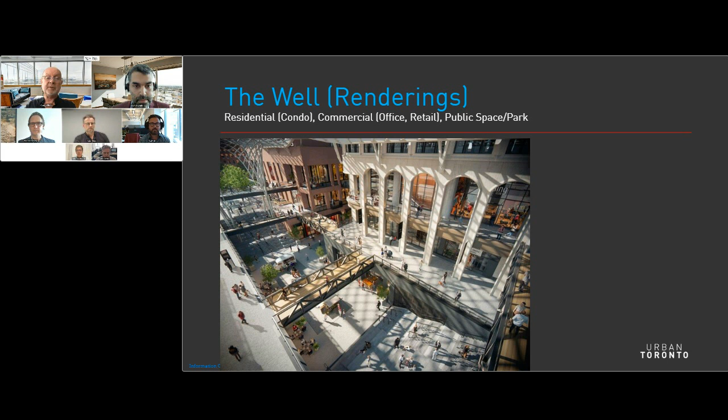Let's go all the way back to the beginning. Front and Spadina, on the upper middle right area of this slide, you can see the red brick building in front where Stantec and Adamson Associates are, and around that space, before the GO tracks, is where the Globe and Mail used to have their offices and printing plant. They have since moved out, and a huge tract of land, I think 18 acres, with small low-rise buildings on it, was highly underused. After being bought by RioCan, RioCan brought in Allied for offices, and Tridel and Woodburn for residential, along with Diamond Corp as well.

Adam Feldman from Architects Alliance, who have designed the residential buildings along Front Street. We'll be talking to Rod Pell from Wallman Architects, who've designed the residential buildings along Wellington Street. We'll be talking with Adrian Price of BDP, who has brought the whole retail experience to all of this. And we'll be starting, and coming back to later, with Michael Conway of Hariri Pontarini Architects, who were first approached by the developers to envision what could be built here, and then ended up also designing the office tower later on. So Michael, take it away.

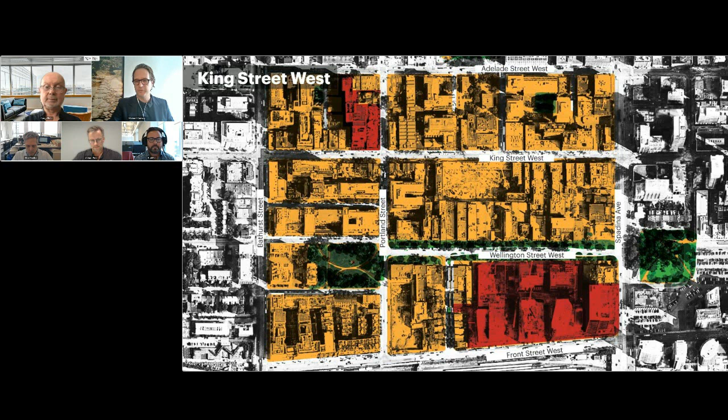One of the things that really defines the King West neighborhood is these really large former industrial blocks. But as you start to move through it, when you're walking, you quickly realize that it is a very porous neighborhood that is interconnected through a series of laneways and passageways that link all of these different blocks together. So when we started looking at King and Portland, one of the ideas was really trying to pick up this idea of this internal block network.

And then as we started looking at bookending it with the Well, it was really looking at taking these cues from the vibrancy that was starting to happen within King Street West, and really start to move that logic down through the Well.

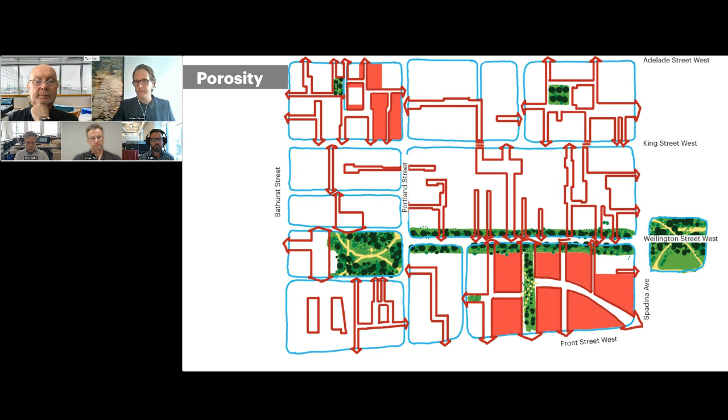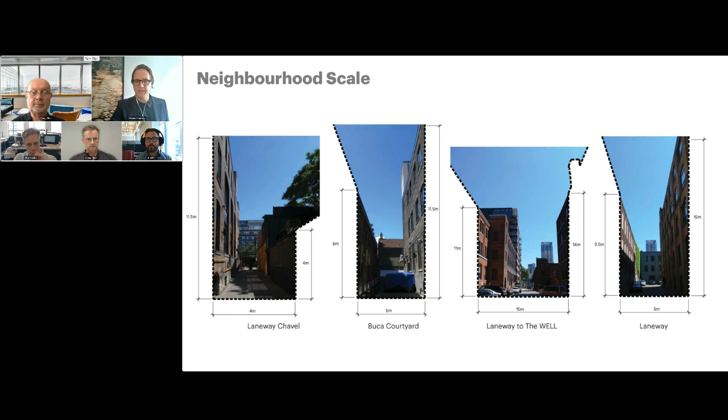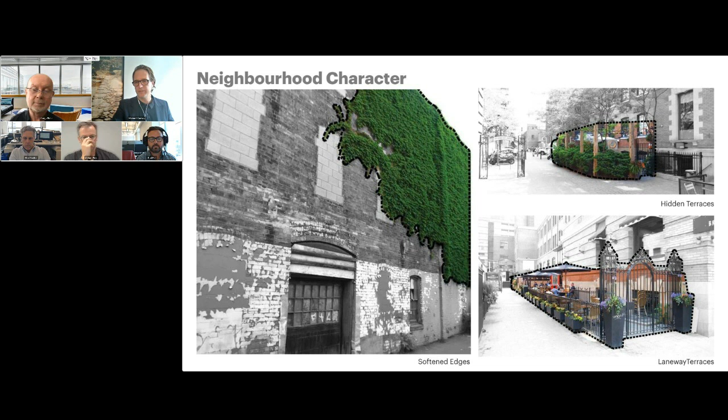One of the first things we started to look at was just walking through the neighborhood. It has a look and feel that is quite different from a lot of the different districts within Toronto. So we started to document some of these passageways and laneways, putting dimensions to it and number of stories, to get a sense of what it was about these spaces that held such a strong fascination within this part of town, as well as these spaces that started to emerge in between. We started to see these hidden terraces, these laneway terraces, as well as really unexpected moments that took place around some of these corners.

One of the first things we started to do was also engage with the community. With the community, we put together this drawing, what we called 'What We Heard,' which was three main ideas that we really wanted to push onto the site as we started to look at how we could define and develop the master plan for the Globe and Mail.

So the first thing was really this site wanted to be part of the King West neighborhood. So looking at tying into the existing laneways happening within King Street, and really drawing it back towards it. The second was connecting Victoria Memorial Park with Clarence Square. And then the third was bringing Draper Street into the development as a way of connecting it to Spadina.

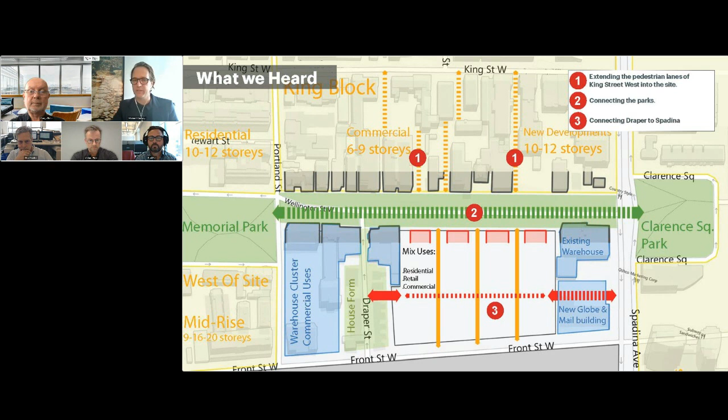At the same time, we started looking at trying to define what we wanted it to be, and also what it wasn't. So some of the early thinking is that it's not the financial district. It's King Street West - a vibrant mix of post and beam brick buildings that has vibrancy morning, noon, and night.

The second was that it's not a shopping mall. We started to look towards European examples of what we were calling urban retail. The partnership from the start ended up going to the UK to visit a lot of these mixed-use sites that were starting to be developed downtown as a way of revitalizing some of the older downtowns within the UK, which brought together retail and mixed-use elements.

So looking at the initial floor plan or ground floor plan concept, we started to incorporate these elements. The first is tying in these laneways from the existing King West neighborhood. The second was Claude Cormier starting to look at connecting the parks through what we're terming a barbell park. And then the third was this idea of the spine moving through the center of the project.

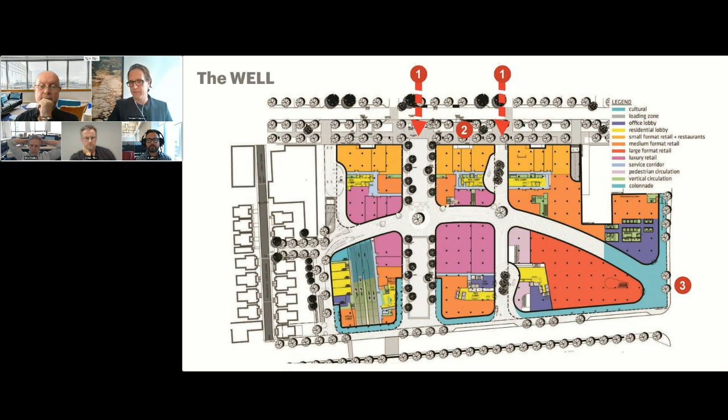One of the things that was kind of interesting with where we started to arc it was that it allowed the buildings to have different characters within the master plan. The Wellington buildings had a smaller scale that responded more to the post and beam industrial buildings along Wellington Street, but also opened up to larger blocks towards the south that could incorporate larger retail.

On the second floor, what we needed to do was create a racetrack that connected all of the second floor retail together. So one of the ideas we pushed was rather than having this exterior to the buildings, we pushed it into the building as a colonnade, and then used a series of bridges as a connection between the buildings, creating a free-form positioning within the master plan where it's just connected by bridges.

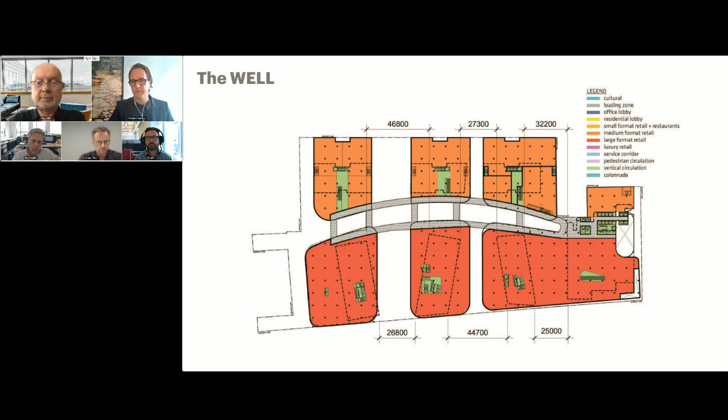And then finally, as we moved past the rezoning, it started to get divided up into multiple architects to really create that look and feel that's very much important within a city where it's not designed by one hand, but a collection of multiple architects working together.

HPA had worked on the office building at 8 Spadina. Architects Alliance had done the residential buildings along Front Street. Rudy Wallman Architects did the residential along Wellington. BDP had looked at all of the retail, and Adamson had looked at all of the below grade as well as all of the commercial aspects of the project.

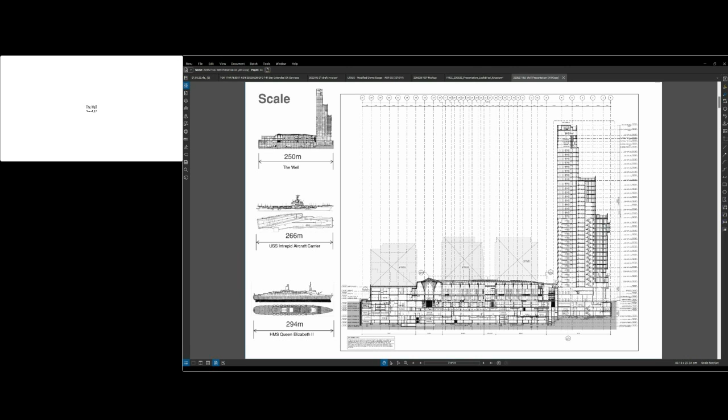As far as the project statistics, here are two images showing one of our working drawings of the below grade and an image of the project once it was well under construction. As Craig mentioned at the beginning, it's 7.7 acres with an overall footprint of 29,000 square meters, well over 300,000 square feet. There are 7 buildings, the tallest of which is Building G.

There are 7 basement levels, about 148,000 square meters... let's call it 1.5 million square feet of office, about 1.5 million square feet of residential. Total overall area is 3 million, probably close to 4 with the basements. 1,662 parking spots, probably one of the largest parking garages in the city. 30 loading bays and 2,600 bikes.

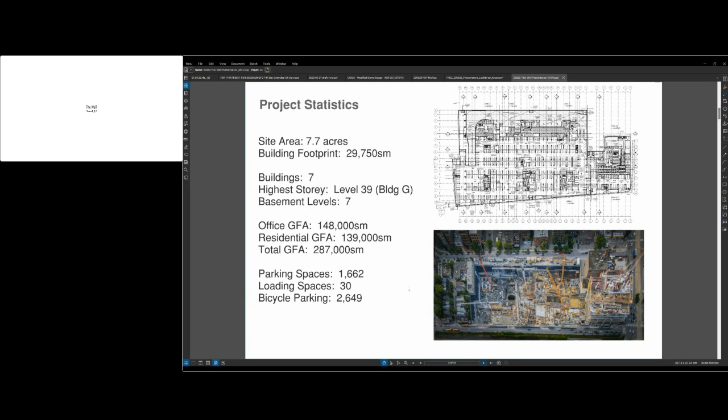Very large program. By the way, it's worth noting that the project does include a well, which you can see here as that round circular shape, which is a 75-foot deep well providing deep water cooling from Enwave.

As far as the org chart, it's often looked at as deceptively simple, but it's a critical element to organizing the team, the players, the stakeholders. This basically shows how we organize the project and the people involved. There's a tripartite owner: RioCan, Allied, and Diamond.

We, as the executive architects, coordinated a number of consultants as well as the owner's consultants. The consultants end up being divided into design, basically 4 designers, 4 prime engineers, and a number of specialist consultants. So 1 executive architect, 2 contractors, 3 owners, 4 architects, 9 owner's consultants, and 27 prime and specialist consultants — a large group of contributors and stakeholders that need to be managed and organized.

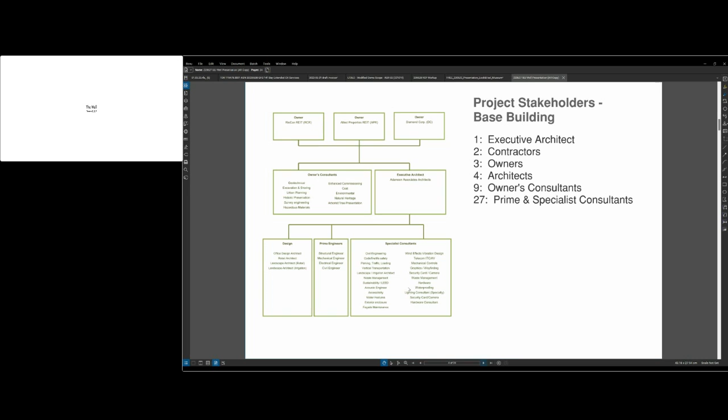Another tool that becomes indispensable in organizing a project like this is a clear schedule. Ultimately, a project of this nature turns into a schedule with thousands of line items, but in order to manage a team, one of our ultimate goals is to break it down into simple, understandable schedules, durations, and milestones.

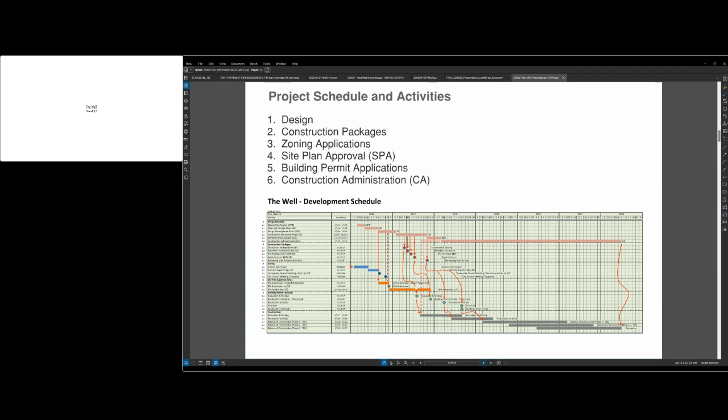For us, there's always a design schedule, a number of construction packages, a zoning path we have to follow through zoning, site plan approval, building permits, and construction. What was challenging here was the schematic design, design development, and CD phases — really 4, 5, and 9 months. Managing 7 buildings within these timeframes was very challenging, and how the building permits dropped out of that. This was done in 2016, but we ended up being very close to this completion date, so I think we got lucky.

Thanks to the skill of a lot of people. Another indispensable tool we use to organize a project is called the responsibility matrix. This is something we've been doing as a firm for a long time — a tool where we organize all of the stakeholders across the top, and we take the phases of the project, SD, CD, specs, approvals, bidding, negotiation, down the left-hand side. Every single individual company is assigned a role: prime, support, review, no role, or not applicable. This ultimately becomes what I'd call the project genome — it's almost like the DNA for the project, an indispensable tool for organizing who does what at the beginning.

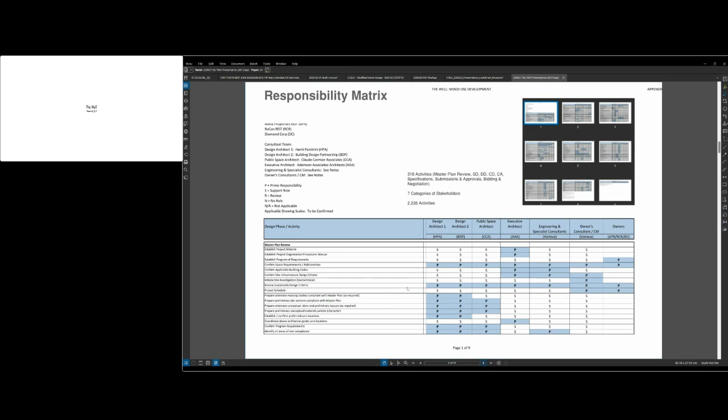We call projects like this very similar to what we call super tankers. You've got to load them up right at the beginning of the job, because once it leaves the port, it's very hard to turn around and go back for more gas or supplies.

So once again, how do you do a project of this size, shape, and complexity? It's by breaking it down into understandable, manageable pieces. In a project like this, it basically organized itself into 4 teams: the Building A team, which developed drawings for the buildings on Wellington, similar in size, shape, and complexity, ranging from 12 to 15 stories; Buildings D and E on Front Street; and finally the high-rise office component, F and G. It all boils down to people.

This was Anna, Rasha, Navjit, Steve, and everybody contributing to a typical set of details. That becomes our toolkit of typical details, which we can distribute and organize at the beginning of the project, and use as a kind of toolkit throughout.

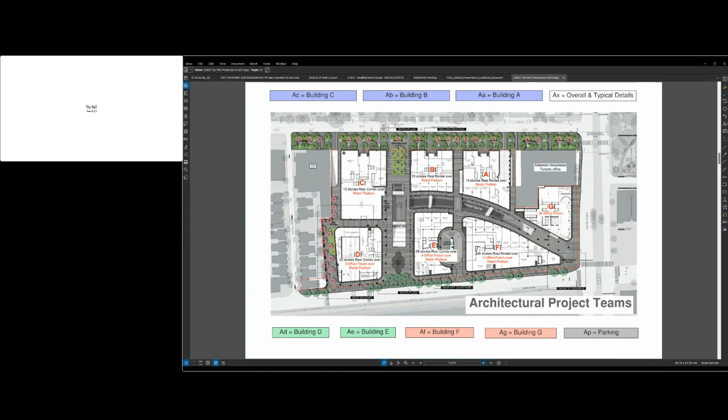Now, something we were asked by the client to do, which we don't normally do, is called stratification drawings. It was a very interesting exercise because at the end of the day, this project organized itself into what ended up being 14 buildings, or let's call it 14 different properties, and each one is identified with a color.

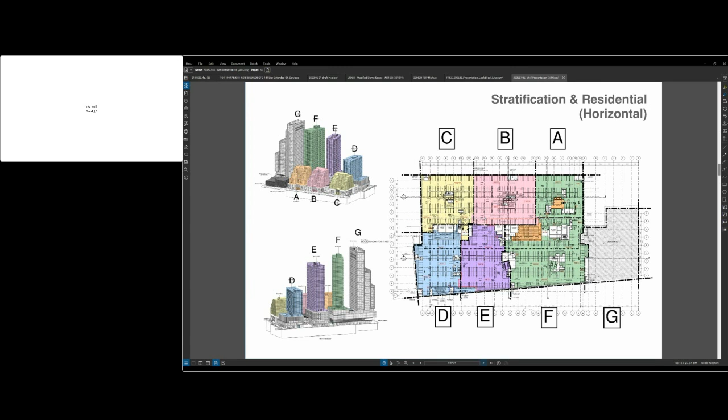Stratification became very important because, at the end of the day, the residential component, which I'll get to later, was organized on top of the office buildings, and everybody needed an easement over somebody else's property. It became a very complex exercise. This was ultimately handed to the surveyors, and they said this was the most complicated set of strata drawings they'd ever done. We were lucky enough for it to be our first.

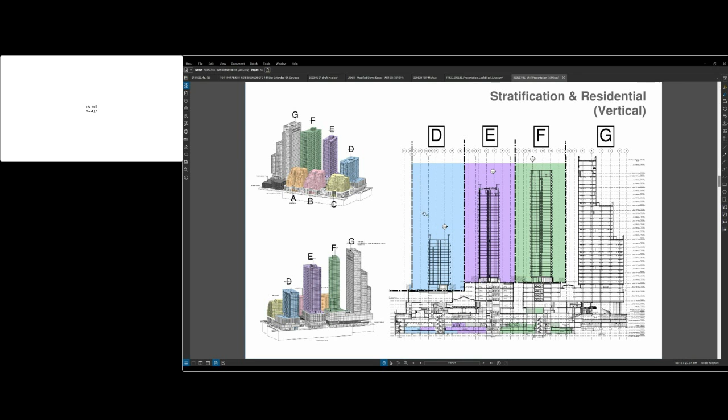So what ended up happening was that we had to coordinate all of the services, access, elevators, vertical transportation, utilities, you name it, to come into the site and be prepared to accept these buildings. So it literally became a plug and play type of scenario.

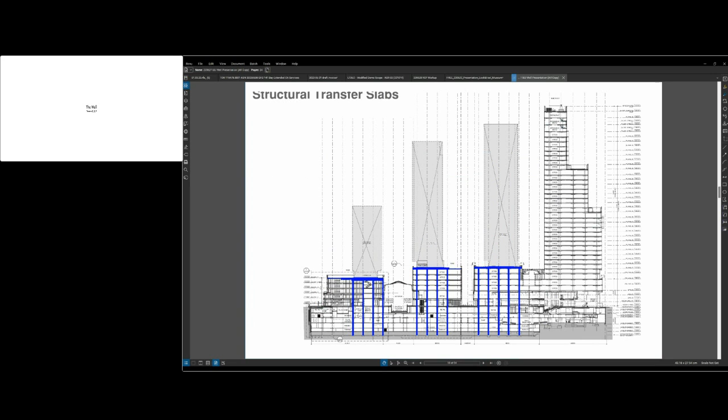Another indispensable tool when we talk about how we manage the design, the schedule, and the phasing was the use of a transfer slab, which we worked on with RJC. Here you basically see a representation of how those work. The transfer slab became incredibly useful because it allowed the designers of the residential buildings to continue designing as the circuit board, or the base building, continued.

It allowed them to continue designing and identify different shear wall options for the suites. It also allowed us to go to a wider column grid underneath, which was more appropriate for office buildings as well as the spaces in the podium and retail areas.

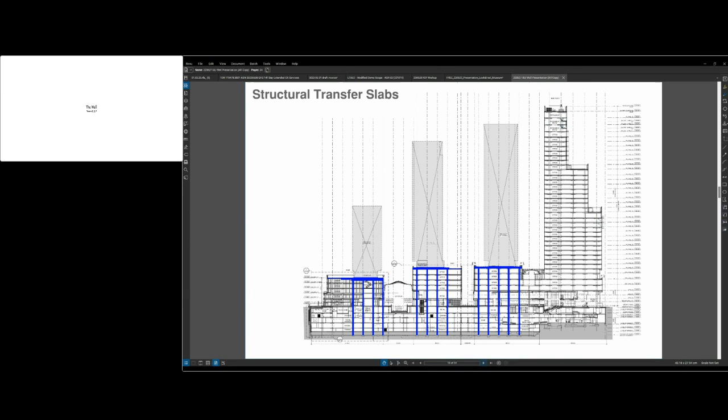These loads then become transferred to the transfer slab. We also had a transfer zone for the utilities, where utilities were capped, allowing these two very disparate aspects of the site to continue and march independently. It allowed the residential buildings to come along at any time in the future; however, at this point in the project, they all marched in sync.

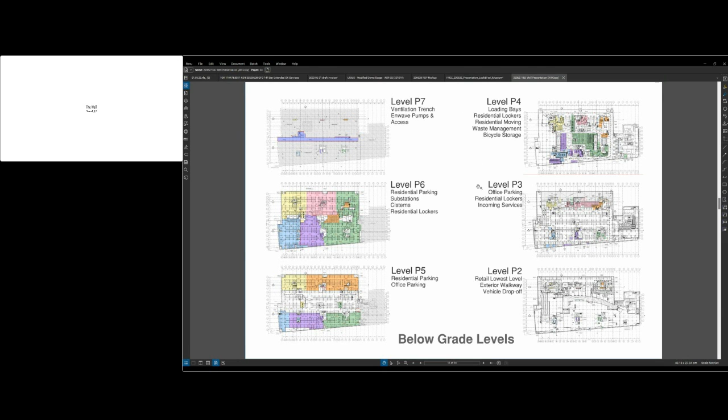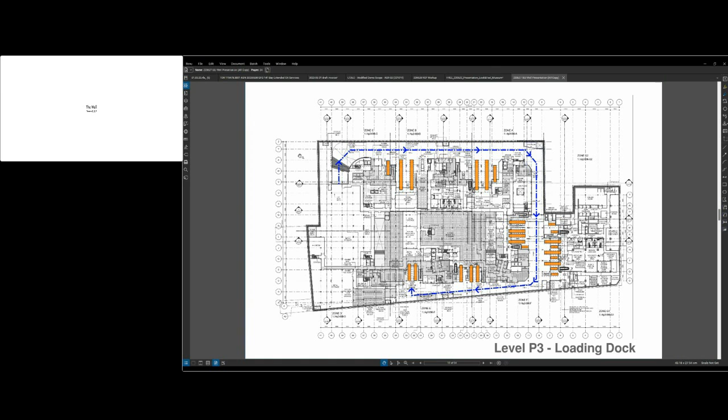I thought it's worth showing this level because once we identified exactly what it took to service a project like this, we realized very early on that this would need a dedicated service level, providing access for type A, B, C, and D trucks as well. So 30 vehicles come down the ramp, and every single core and every single residential building basically had its own loading, bikes, storage, moving, waste, and the vehicle servicing these can easily identify and use each one of these, with the office building located to the east.

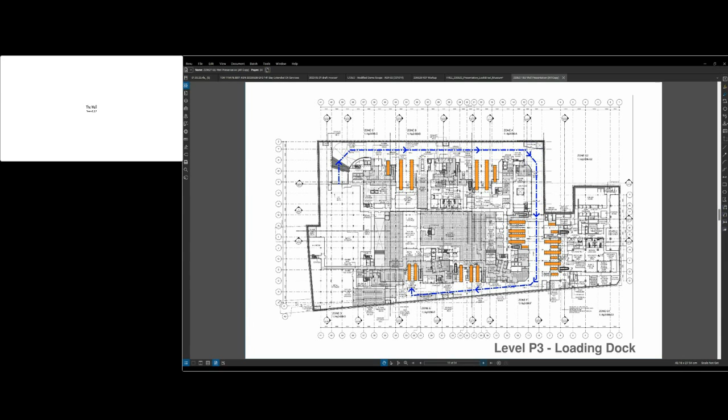This is another representation of what we call the circuit board, or the plug and play. In principle, these colors represent the residential buildings coming down, and these are enlarged plans of these sections. As Adamson Associates and our base building consultants, we coordinated with the residential architects to develop the cores.

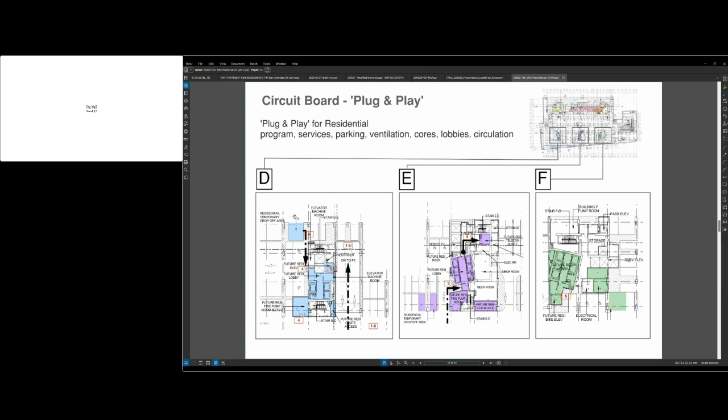So we basically drew all of the cores, utilities, and vertical elements that could not be built at a later date, so that they could be fit out by the residential team at any point in the future. This is a horizontal representation of how this works. Basically, the buildings plug in above the transfer slab and continue down to the basement, where you have the cores accessing the parking levels.

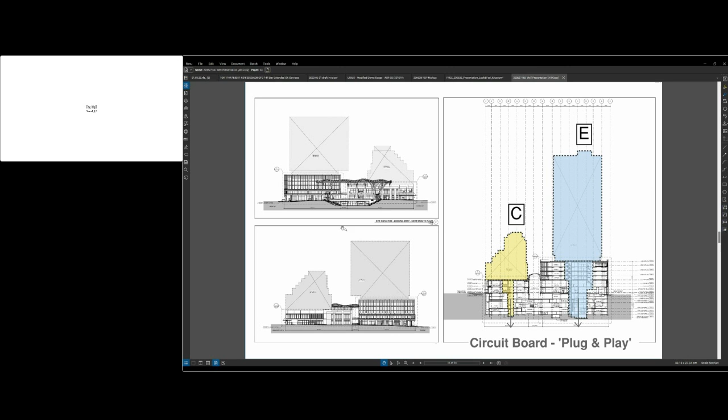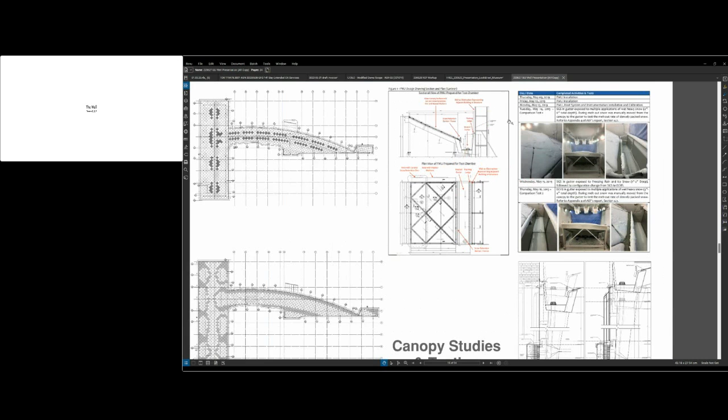These are some sections of what we call the grid shell canopy. The grid shell canopy was a project unto itself. We worked very closely with RJC and EDP to make this happen. We reviewed multiple iterations of ways the glass could be optimized in terms of bends, size, and sheets, and a mock-up of this was built in a chamber in Oshawa so we could test exactly how the huge amounts of snow and ice that would accumulate could be melted, managed, and moved. These are some images from the testing chamber, as well as some sections. These were massive gutters, 1 meter by a meter by a meter.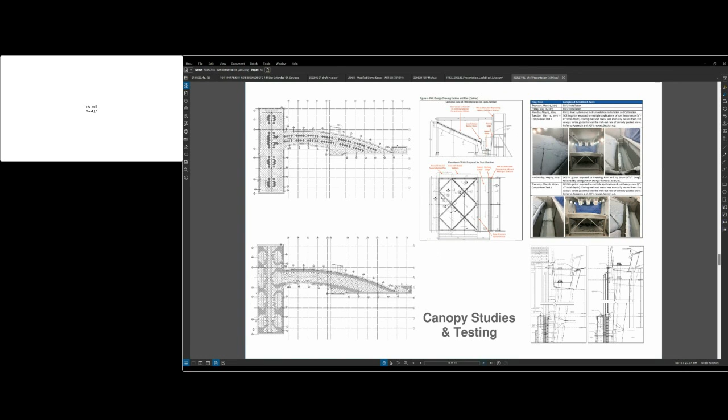These are some elevations and sections of the office building, some quick plans. It was interesting because this was a rather unconventional office building in terms of its organization of the core and how it was laid out, but very, very successful—it provided some really, really amazing spaces.

Now, I think I'm probably out of time. We just have—great, well, I'm done, so I'm ready to move on. Thank you very much. Thanks very much, Alex.

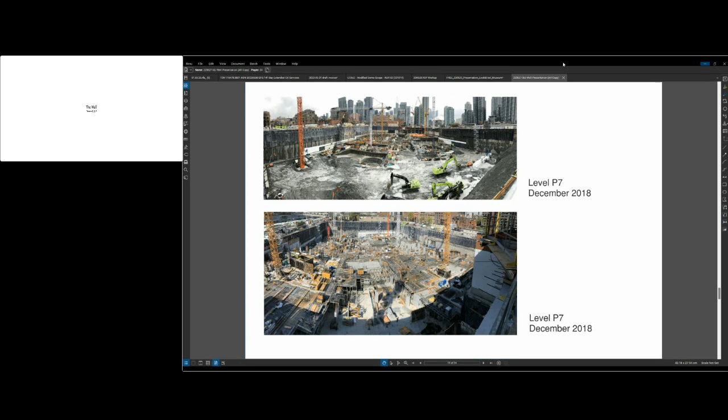Thanks, Craig. Can we see the screen now? We're back to the other slides. I stopped sharing. It's okay, all perfect now, so right—Adam, you can click along on the slides below and hit push to audience whenever you want them up. Oh sorry, are they on the screen now? We are on the screen now. So click on a slide below the screen, hit push to audience. So you're going to have to help me with this one. Okay, I can do the pushing to audience if you'd like. If you could, that would be great. Just let me know when it's there. Okay, go ahead. It's there, great.

Okay, thanks Alex. I'm Adam Feldman from Architects Alliance, and I also have to give credit for this one to Oliver Laumeyer, who is the associate in charge of this project, who worked tirelessly as part of that org chart that Alex showed. And I think Alex hinted at the complexities of this, but it went deeper and deeper and was quite a remarkable endeavor. But he got to talk about that, so I won't.

We were tasked with the Front Street residential buildings, and it was an interesting challenge because these buildings didn't touch the ground. Normally they're rooted in foundations and everything, but someone else dealt with those. So these are literally towers in the sky. Two of the buildings were with Tridel, and one, the building on the east, was for Woodbourne and RioCan. Just in these three buildings, there was about 1 million square feet of residential GFA and about 1,250 residential units, half of which were dedicated rental.

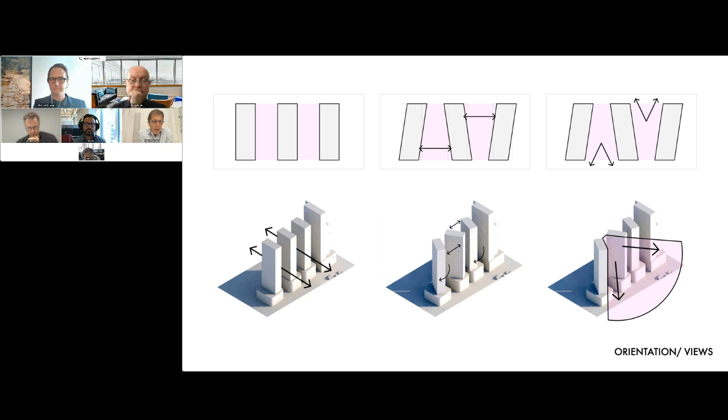And these are just some of the studies we looked at. The other challenge was how do you stick a building on top of another building, and what that interface should be. Alex talked about the structural and mechanical complexities.

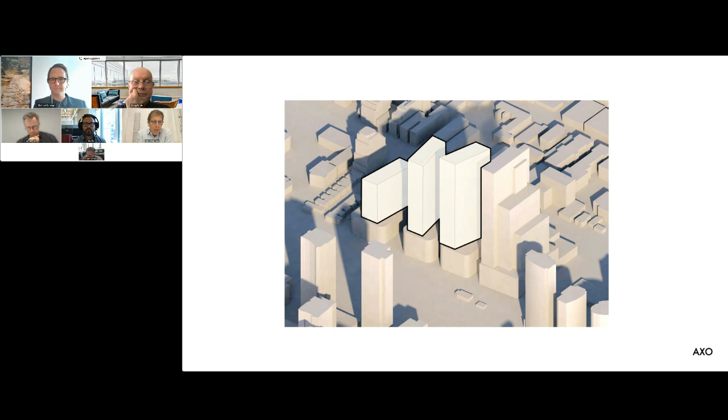For us, it was really about how to take a large building and have it touch down lightly. What we ended up with was a sort of sandwich in between, lifting up to expose a soffit, so to speak, of these buildings, working with the other architects to locate amenity spaces for the residential units above and some mechanical spaces for the office buildings below, in between, as a sandwich that allowed these towers to float across the site.

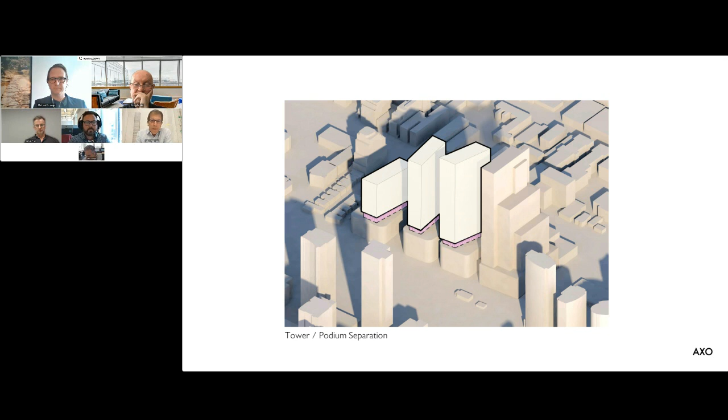This is a view from Front Street looking north. As you can see, the towers step up to the east towards Spadina and down to the west, ranging in height from 22 stories on the west to 46 on the east. The white building on the right is the rental building, the tallest building.

Once we resolved the shapes, there were a lot of studies on how to deal with balconies, how to deal with facades, and how to really focus on amenity for the building users, for the residents within them, looking at views to the city and around, and how they would inhabit that space.

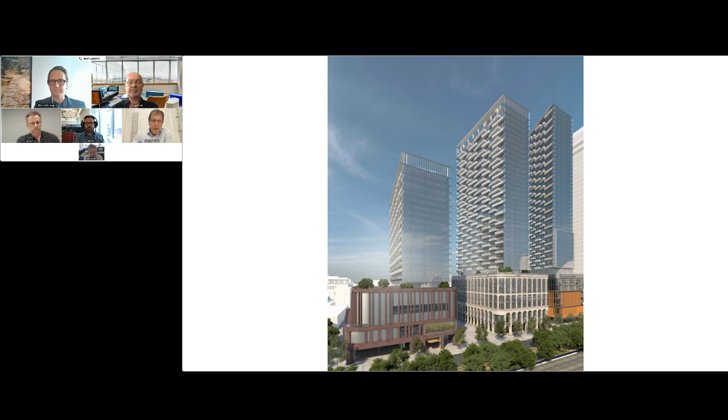After many studies and working closely with our clients, we've ended up with a building design that I think is very elegant, and creates this great entry point and sky view across the site.

This is a marketing rendering from Tridel. And this is a similar construction photo from UrbanToronto, remembering what it used to look like as this massive construction site that actually very closely resembles the renderings in the studies. It's a very exciting project to be involved with.

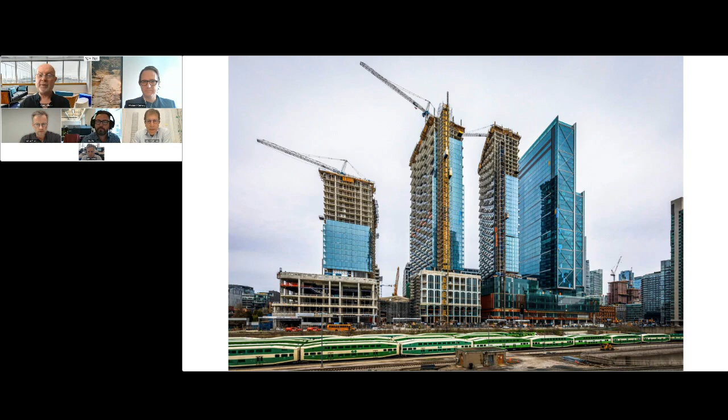Hi, Rod. Take it away for Wellington Street now. Great, thanks, Greg.

The scale of these buildings was really derived through the rezoning and urban design process, with the idea of creating transition from the taller buildings located on the Front Street side, down to the smaller scale buildings which exist on Wellington Street, on the north side of the street.

The massing of the buildings was also derived through that rezoning and urban design process, with the intent of breaking the scale of the buildings down even further. We've got 3 buildings here, but the intent was to break those facades down into smaller portions. So the residential entrances in the center of each building were recessed back from the retail frontages to essentially create 6 frontages from a pedestrian scale, which broke down that scale and character of the buildings to closely match the existing buildings on the north side of Wellington Street.

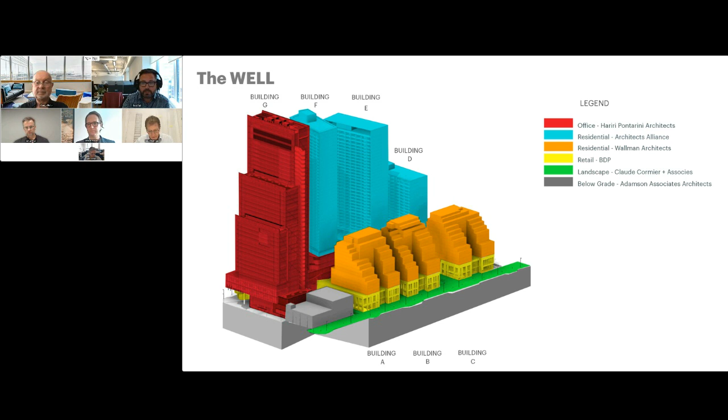The Wellington Street buildings were also designed to respect the urban design guidelines developed through the early days of the development of the site. The podiums themselves were designed to reflect the materials of the existing Wellington buildings, using brick to add some texture along the pedestrian frontage. Lighter materials in white and gray were chosen for the upper portions to help emphasize and differentiate them from the podiums below.

The facades of each of the buildings were intended to have an individual character while sharing a similar architectural language. Building A, the building furthest to the left, was designed to have larger, perceived 2-story openings. Building B created a vertical expression with 2-story openings in frames turned vertically to create a running bond pattern. Building C had a similar expression to Building B, but turned horizontally to create a double bay expression emphasizing the linear nature.

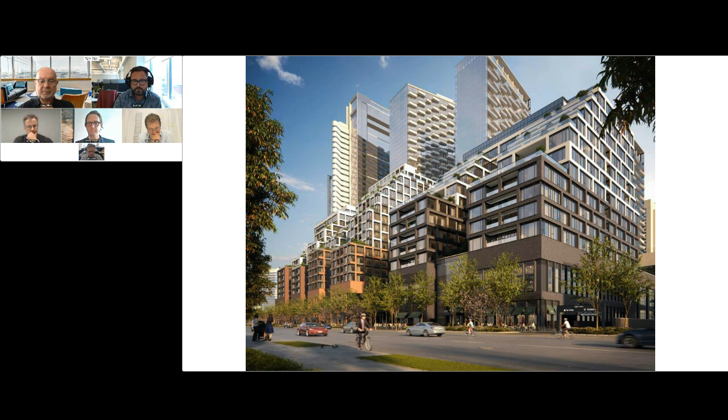Okay. Sorry, Craig, sorry, just running through a couple more slides there. Rod, are you done with your section? No, I was just... No, okay, keep going. Sorry, if there's a time issue I can try and speed things up. We do have a time issue, yes. Okay, I'll try and get through this as quickly as I can then.

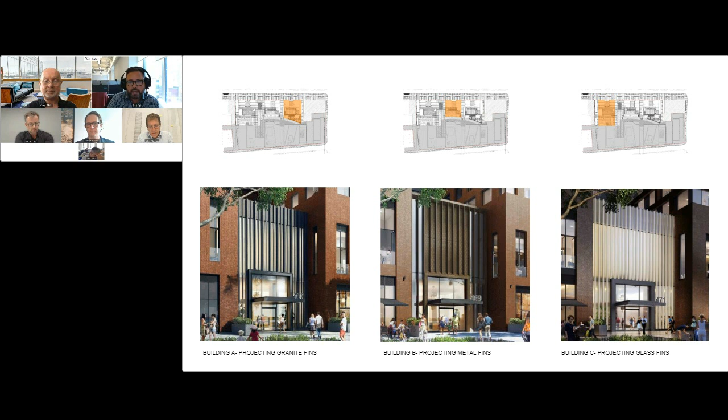Looking at the residential entrances of each building, we worked with both Adrian's team at BDP and Alex's team at Adamson to develop these entrances along Wellington, trying to create an individual character for each building while keeping the same architectural expression. Building A creates a vertical expression with granite projecting fins and a framed portal and canopy. Building B has vertical metal fins, and Building C has vertical glass fins.

I wanted to touch on the terrace nature of these buildings, which presented some challenges in terms of suite design, as well as the U-shaped floor plate format. But that also gave us the opportunity to create large outdoor living spaces and larger units generally across each of these three buildings. The unit sizes are roughly 900 square feet on average, creating larger, family-oriented unit sizes and wonderful outdoor living spaces.

And I'll just leave it at that, Craig. Thank you very much, Rod.

Along with the residential buildings lining both the north and south sides, on the east side of the site at the southeast corner there's an office tower, and Hariri Pontarini took on the job of designing that. So Michael, take it away again.

Great, I'll make this pretty quick as we are running up against the clock. One of the first questions we started asking ourselves about the office building on the corner is: what does an office building look like growing out of the vibrancy of the King West neighborhood? As I mentioned before, it's not a financial district, so we started to explore the nature of the building through these diagrams.

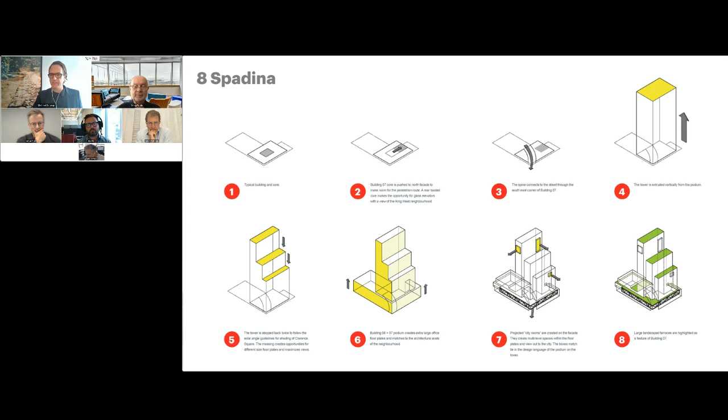As you can see here with the side-loaded core, by pushing it to the north, it started to create an interesting opportunity that came up with it.

First was one of the ideas of being able to utilize this elevator bank as glass elevators. You can also see how the spine naturally lands right at the corner. So what we also did was we looked at the lobby of the main office building as having a Spadina address.

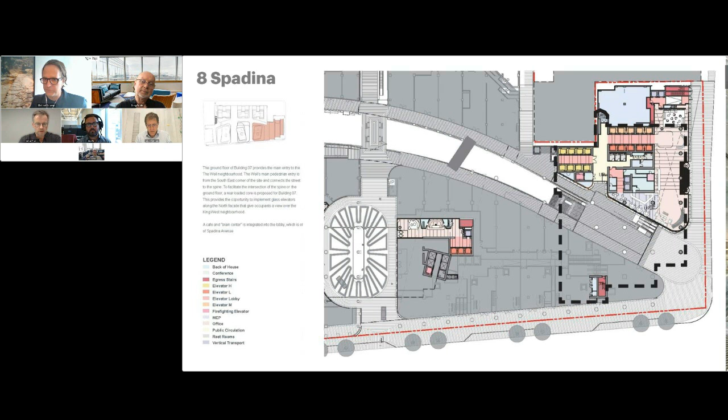So really tucking it in underneath the building, facing Spadina, we ended up integrating a small cafe within the lobby. This is a view from inside the lobby that shows the staircase, the cafe, and the main lobby space. The furniture created here, as you can see in the foreground, was all reclaimed beams from the existing Globe and Mail building. We had a furniture maker take these beams and create this furniture with them.

And then you can see what it looks like at the Spadina entrance into the spine, the main lobby coming down, transitioning into the terracotta, and then moving into the heritage building, which is Adamson's office right on the corner.

One of the things with stepping the building back is it created something the client really liked, because instead of having 36 floors of the exact same floor plate to lease out over the next 100 years, it allowed them to have a variety of different size floor plates.

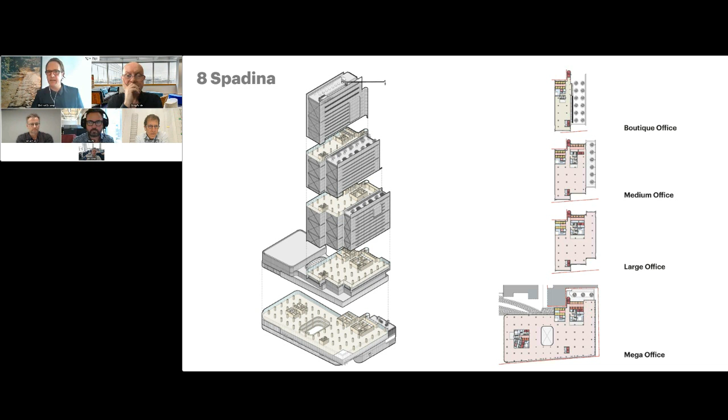Starting at the bottom, we have this 70,000 square foot mega floor plate, moving into a large office plate of about 33,000 square feet, then into the medium office, close to your traditional 24,000 square foot downtown floor plate, and finally these 13,000 square foot boutique floor plates.

Looking at all these elements coming together within the elevation, we talked about the lobby, the entrance spine. The glass elevators can be seen, especially at night, moving through the elevation, along with the large terrace setbacks. By having the side-loaded core, it also allowed us the opportunity to have a very strong expression of the exit communication stair.

This is a way of bringing natural light into this circulation space required within a building, while allowing people the opportunity to actually use it as a communication stair between units. This is a view of the green terraces, and finally, a shot taken last week showing the well on site.

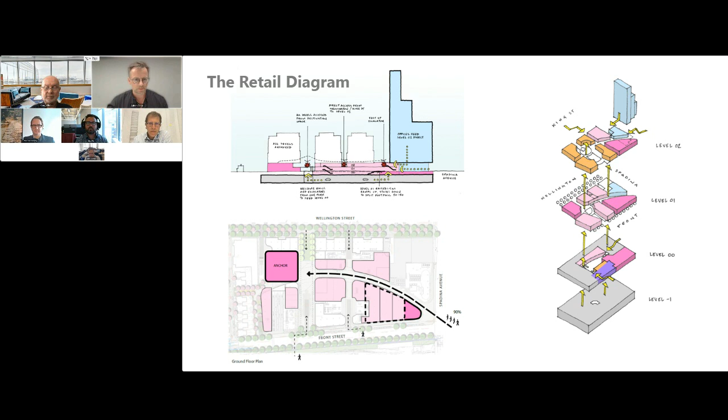In terms of an architectural strategy, we were primarily concerned with 6 blocks, A to F, and we devised this idea to create individuality with these buildings by starting with a very simple industrial aesthetic akin to the brick and beam buildings surrounding the King West area, and gradually getting more refined as it went through the blocks, with more sophisticated use of materials until you get a very refined civic quality onto Front Street. Of course, all of these buildings were connected by metal bridges, which gave this very dramatic internal character.

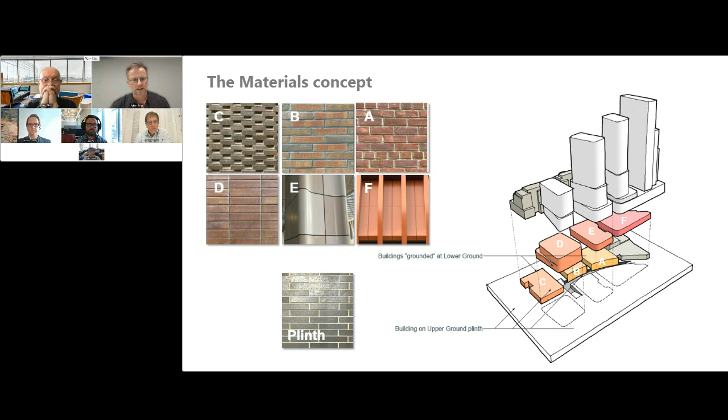Materiality was incredibly important to this project, and I think when you visit it, you'll be struck by the richness of the materials. We have this terracotta palette, starting with simple brickwork, then introducing long bricks, textured bricks, stack bonded bricks, terracotta panels, and finally a terracotta-coloured rain screen for Building F. The way the buildings were either grounded at the lower ground or sitting on a brick plinth also gives this variety to the internal spaces.

So I'm just going to quickly run through a series of CGIs and some construction photographs of the project. You've seen this before—this is the Front and Spadina entrance. Making a strong entrance is incredibly important. The retail is brought right to the fore with an Adidas store on the corner with a digital video screen, which you should be able to see from Union Station.

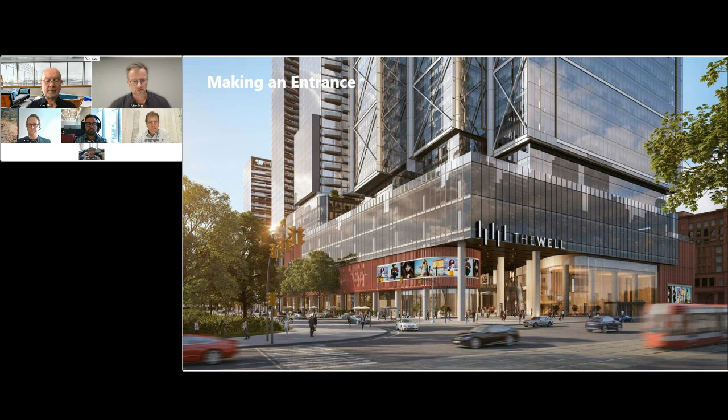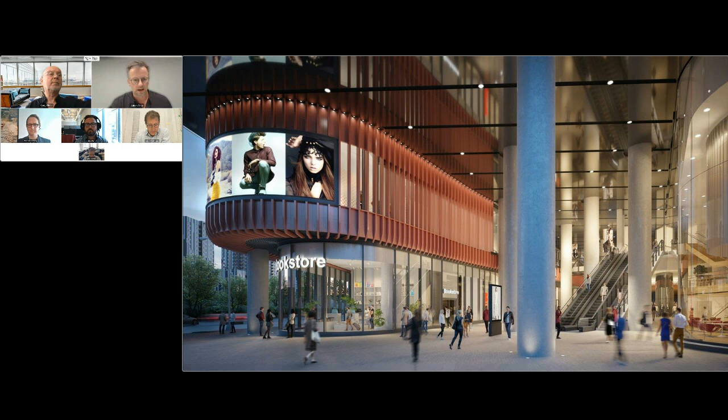As you enter this space, it's a dramatic double height space with those mega floor slabs above you. What you see there in front of you is this fast-up escalator that can take you straight to the second floor, or you have the decision to move through at the ground level or descend a staircase to the lower ground level. And when you do that, you really get this idea of retail theatre.

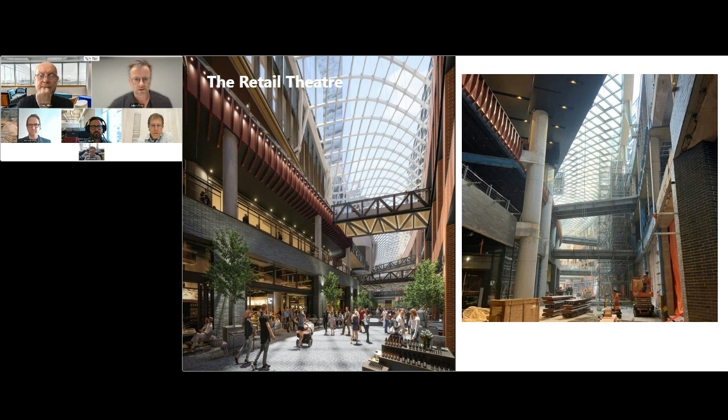So this is a view on the left of the lower level. You have 3 levels unfolding above you with this curved street wall, which should be quite unique in Toronto. On the left is the food market, 75,000 square feet, with the retail on both sides. You see those metal bridges crossing over the space and topped by this glazed roof canopy, which is quite unique in its form, and on the right there's a fairly recent construction photograph.

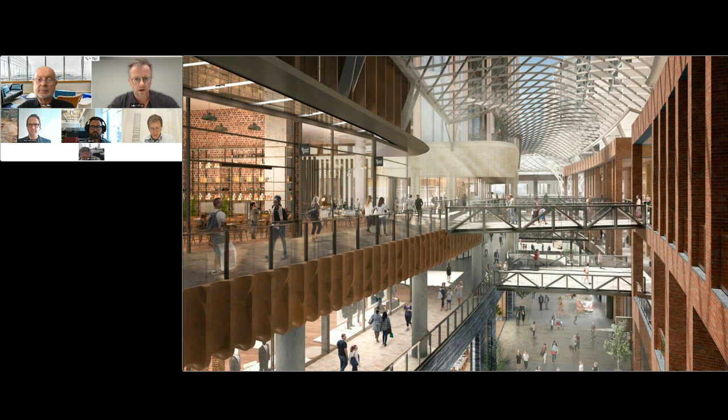The same view, but from the second floor, as if you've come out from the office that Michael's just been describing. You see this same view, but looking at the upper level, looking west towards the destination space and the anchors at the other end.

And if you go right the way to the end of the spine at the lower level, you'll see this streetscape unfolding in front of you. Part of this is actually currently open to the public to access one of the units which was opened up.

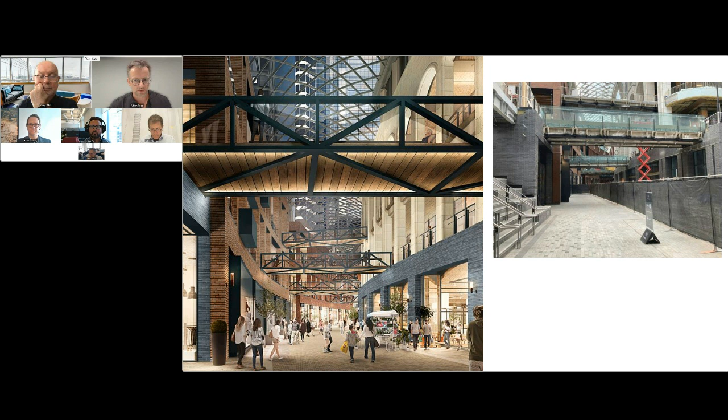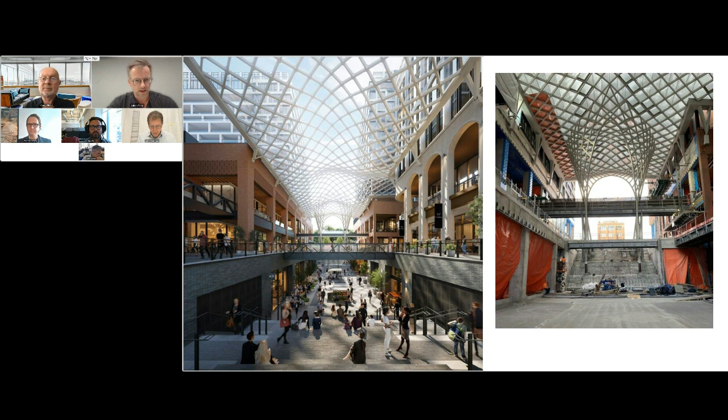And the finale really is a space known as Crown Square. This is a space that you descend urban staircases at both ends, and these staircases have amphitheatre-style seating so that people visiting can watch performances, concerts, street theatre, and really engage with this space very much as you do in Covent Garden in London. Of course, that's topped by this dramatic roof canopy.

I'll just finish off with the canopy itself. I think in all of our retail projects, we like to leave the visitor with something memorable, and in the case of the Well, the canopy really is the standout feature I hope people remember. At 35,000 square feet, it's probably one of the biggest umbrellas in North America, trying to keep the worst of the weather off, but you'll certainly still need your coat on in winter. So it's been a pleasure to be involved with such an amazing project, and I hope you enjoy this scheme once it's fully open later on this year.